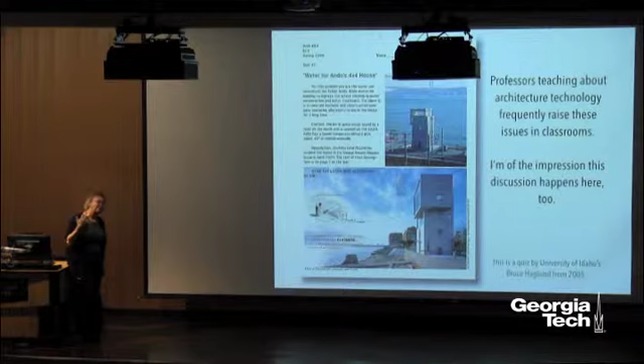You know, Mark mentioned, and incidentally, one of the things I love about dealing with both Mark and Saber is the way that they integrate really rich discourse about buildings. When I deal with them, they're like me. They want to get down there and look at the nuts and bolts and things like that. And that's really rare for design faculty.

I think it's much more common for faculty like myself that teach technical topics to want to engage with both the design and the technology. Design faculty often act like technology is something you can add on later after you've done the diagrams. That may be different here, but that's my general impression with a lot of schools.

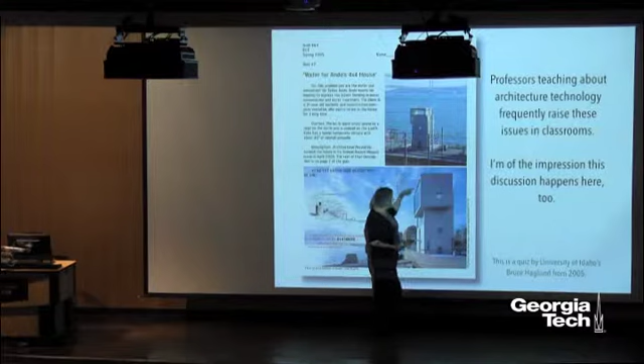This is a test question that another colleague of ours at Idaho made a couple years after the building was completed, in 2005, asking how you would handle some of the water issues on this building. Remember, you're supposed to be able to climb up there and wash the front of this building to get the salt off.

So the water issues in general, let's just start by assuming they're not a conducive part of this whole discussion. For me, as somebody who cares about whole buildings, as somebody who was licensed for about 25 years until I got tired of paying the extra money, I think architecture should have both a pragmatic and a poetic side. I think we can't have one or the other. So I think of it as bread and roses, okay?

And on the side of the roses, that's the whole sort of Vitruvian idea of Venustas, the beautiful things about the building. So with this Ando building, a little tower at the end of the inland sea, that really sounds like a piece of poetry right there. I want to live in a little tower on the edge of the inland sea.

It has an overlarge window. It has a big, tall space. The guy says living in it is like living on a ship. And you can imagine that. Also, if you look more closely, you'll see it's got a really solid base and that it opens up more and more as you get higher, which is another kind of poetic gesture.

And the building has this wonderful sense of both a symmetrical part and an asymmetrical part in balance. And then the bigger game of the two buildings playing with another level of symmetry. So that's the roses part.

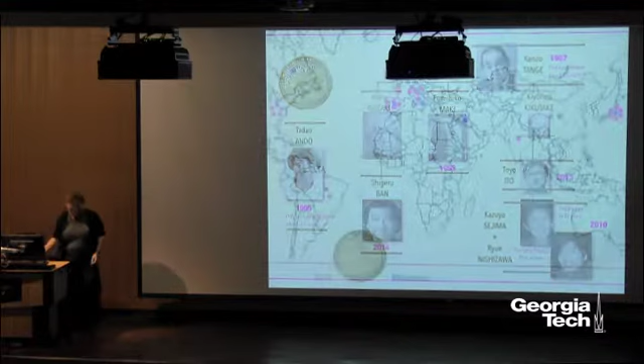If you look at who's won Pritzker Prizes, 7 people from Japan, one of whom operates out of Paris, have won the Pritzker Prize. Only 5 people born in the US have also received Pritzker Prizes. Japan has a third of our population, so they're much more successful on this score. And even if you're looking at immigrants, there's only 9 US-based firms that have won Pritzker Prizes, including people like the Canadian Frank Gehry. There's 6 people living and working in Japan who have won Pritzker Prizes. So the poetry has a real benefit for architects that's worth paying attention to.

On the other hand, the problem is that the reason we get hired, the reason our clients ask us to do things, is not for the roses necessarily, but for the bread. Their decision about the value we bring to them is based on that. And so one of the problems is that if you look at Japanese architects, you can see they're really poorly paid. This is from a few years ago, I think 2013.

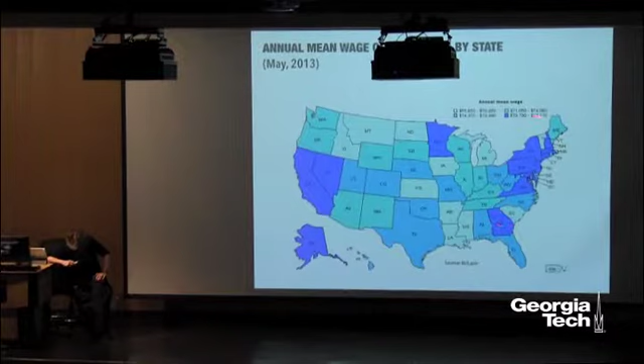The average salary is about $48,000 a year, and this is for people who are around 49 years old with about 16 years of experience. If I told you that you're going into a field where you'd get paid like that, you probably wouldn't be very excited. The good news is in Georgia, it's almost double that, at the exact same time. 80,000 to 93,000 dollars - roughly double the salary for an architect working in Georgia versus an architect working in Japan. That's a big difference, and it says a lot about social value.

If I try to call the office, I never think about what time it is when calling Sejima's office, because there's always somebody there - 3 in the morning, there's somebody there. They don't have the economic infrastructure for secretaries and other kinds of support staff that you're used to here. It's a very, very limited funding context for the studio. So that's an important thing to think about.

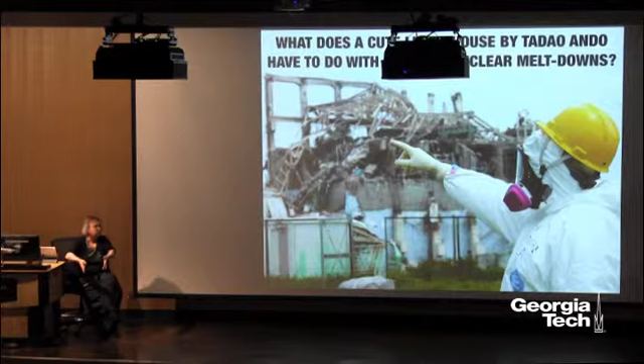One of the things was that in the 1970s, when people were building nuclear power plants, they needed some way to cool them. One idea that looked good at the time was to put the nuclear power plants right against the ocean, because then you could take cold water from the ocean and cycle it through the plant to cool it. Doesn't that sound like a great idea?

The problem is when you have a giant wave that washes up onto a nuclear power plant, it shuts down all the backup systems. And that's why they had three meltdowns. They were actually really lucky—it could have been a lot worse.

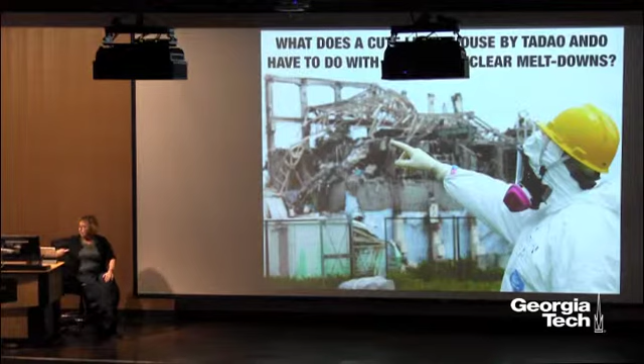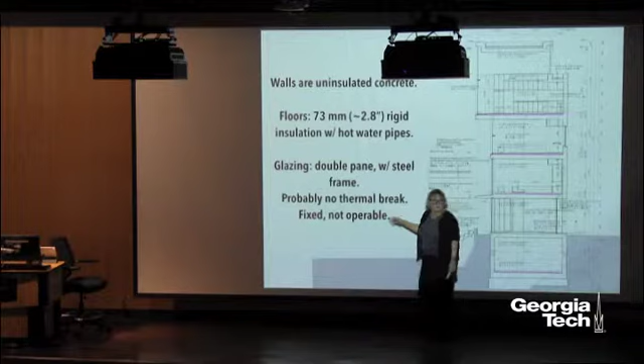There is actually double glazing on that big, tall window, but it's in a steel frame that probably doesn't have a thermal break. There's a guy here from YKK who knows more about whether it does or doesn't, but let's just say 99 times out of 100 in a building from this period, there's no thermal break—and I'll show you other examples. The windows are fixed, not operable. You can't open them. So what are you going to do to be comfortable?

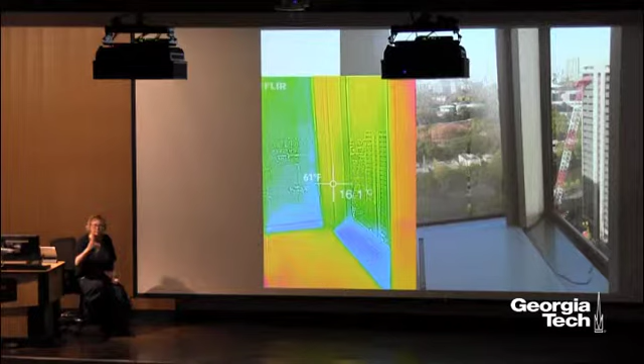Well, the insulation's actually there to keep the hot water pipes hot. You can see it's between an interior space and an interior space. What they're trying to do is make sure the floors, where people walk around in slippers or stocking feet, aren't cold. They thought the best way to do this was to put the insulation right there where those hot water pipes are.

For anybody in this room who's my age or older, these kinds of buildings are not surprising. This one's in Tokyo—it's more recent, and infrared technology allows us to take pictures of it. But if you look at buildings from the 60s or 70s in the United States, you'll notice a lot of the action at the envelope was about dealing with this problem: you have a lot of humidity inside the building, no thermal barrier between inside and outside, the surface gets cold, and you get condensation.

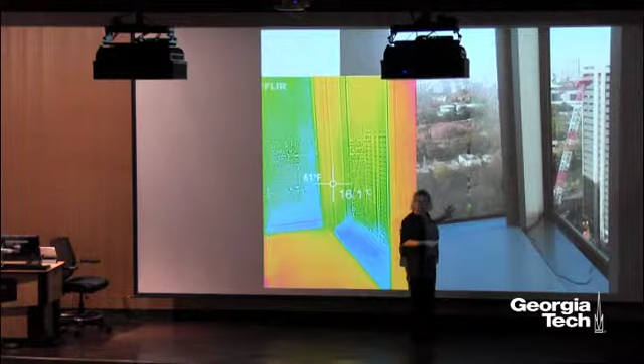This was Dow Chemical's offices. They said, 'we didn't clean it up this morning because we thought you'd like the picture,' because they knew me. This is how much water had collected overnight on their windowsills from condensation. If I'm talking to anybody I know in Japan, they're very familiar with this problem, which creates other problems—Tadao Ando's buildings sometimes have sick building syndrome because that condensation is captured inside the building and can promote fungus and mold.

So this kind of thing is, like I say, not uncommon. We used to have it too—we dealt with it in the 70s. Japan can eventually do the same.

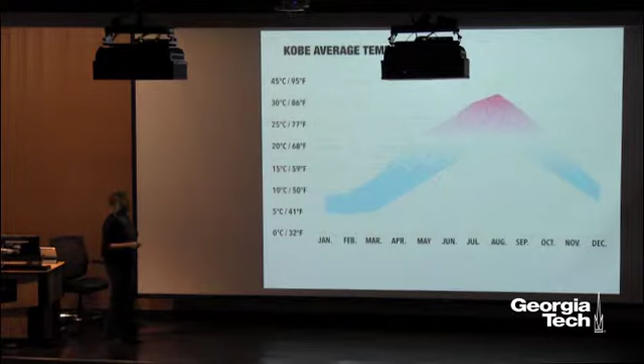Now, Mark and Saber, when I was telling them about this last night, said maybe Kobe's climate is so benign that they don't need insulation. I actually don't think there are many places on the planet where that's true, but you'll be happy to know it's not true here. Here's Atlanta, here's Kobe—pretty much the same latitude. And in fact, if you look up the climate data, here's Kobe's climate, here's Georgia's climate.

You guys get a little colder, as we might be noticing right now, and your summer is longer. But interestingly, the maximum highs and lows are very similar. So this climate is the environment in which this large, concrete, uninsulated building exists.

And this is all buildings. So if we go out into Georgia, some of the buildings you're going to see were built in the 1950s or the 1940s or something like that. And if nobody's done any energy retrofits on them, they're probably not insulated either. But these buildings don't meet Japan's building standards, and the standards are pretty benign, okay?

So the 1999 standard assumes that you're going to have about 4 inches of insulation in the walls and about 7 inches of insulation in the roof. And only 5% of the buildings in 2014 complied with the 1999 standards, right? And 40% of them had no insulation.

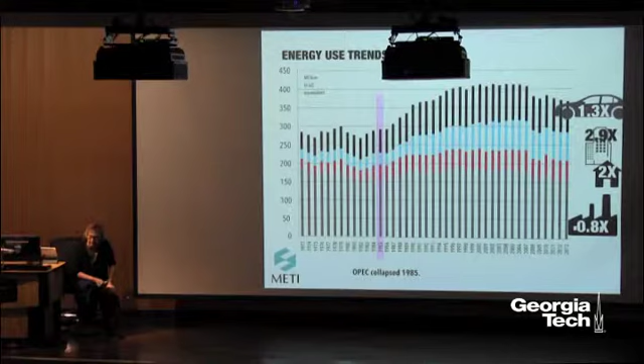Why doesn't Japan, incidentally, those standards I showed you, those aren't mandatory. So why doesn't Japan have mandatory requirements that you insulate buildings? And one of the answers has to do with going back to the oil shock when we all started thinking about this. So in 1973, when we had the first oil shock, one of the things was that buildings used a very small slice of total energy consumption.

Manufacturing, including making steel and concrete, which are very, very energy-intensive industries, used a lot of energy, and transportation used a fairly small slice. But once you started to change the dynamics for how manufacturing used energy, it was also easy to change things like the design of cars and trains. So these two were able to be easily addressed.

And Japan put all its energy into pulling back how much energy was going to be consumed in industrial production rather than in buildings. For the US at that time, this piece was much bigger. We had to deal with it. And so we actually got in front of dealing with energy consumption in buildings as well.

So what happened? Everything stayed pretty flat along this period after 1973 because people were very intensively trying to save their own country's economy by reducing energy demand. All the energy came from outside. Japan's energy self-sustainability rating is about 4%.

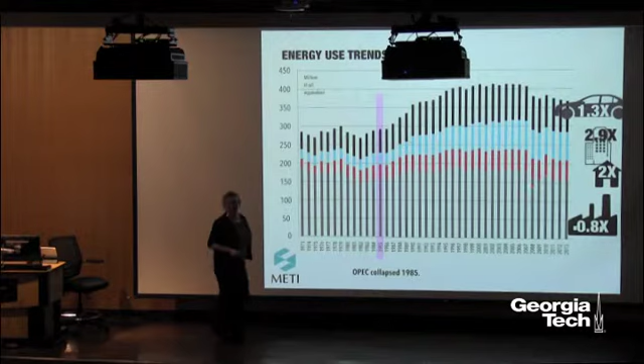Now, these guys don't go up much. Why not? Because in the manufacturing processes, they put in new plants and new equipment, and now they're invested in the new plants and new equipment. And so it's not going to climb as fast. Even though their production's going up, the manufacturing systems are already in place. And you can see transport goes up some, but if you actually look at it in terms of miles traveled or something like that, you'll find it doesn't go up very much.

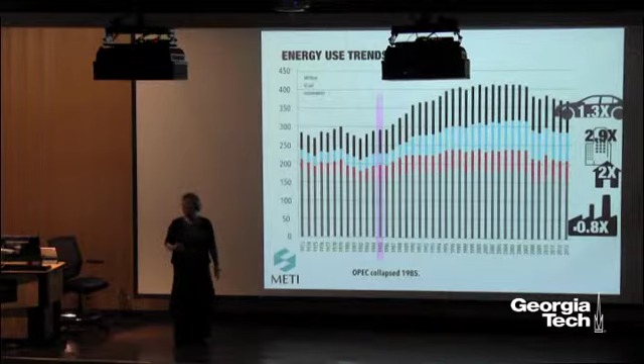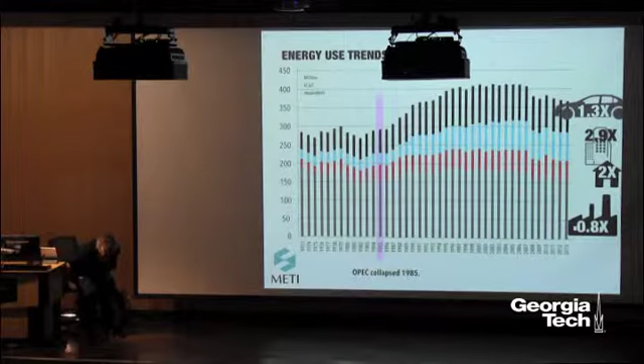But what goes up is buildings. Okay, so manufacturing, the energy actually comes down from '73. Transportation, it goes up some, but the miles traveled goes up a lot. Buildings, residential buildings, 2 times as much energy, and commercial buildings almost 3 times as much energy. So now you're starting to see that the kind of cavalier way that people dealt with energy in terms of the regulations back in the 70s have implications.

So this is Kazuyo Sejima's house. This is where she lives when she's in Tokyo. And one of the reasons I put it up is I wanted to point out that there's another thing going on as well, which is that the architects are thinking of it not as a building which has to survive cold, but as a building which in a kind of old school way can keep you comfortable when it's hot.

So this picture, there's this bench, and it's right there. And there's this giant window that brings air in, and there's a roof piece where almost the whole roof opens up and allows the air to go out. So this is really a shady outdoor space where she can entertain friends and sleep, and all that kind of thing. So that's not bad, well, as long as it's summertime.

Now I'll tell you a funny story about this house. Sejima moved in February, and I happened to be living in Japan at that time. So I went over and said to her, hey, congratulations, new house, right? I brought flowers, all that kind of stuff you would do. And we sat down and I said, how do you like the house? And she said, it's very cold.

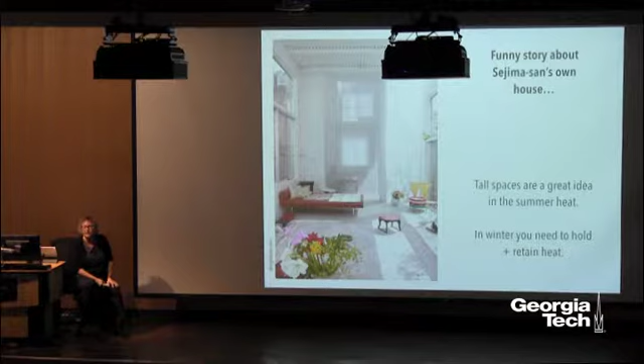It was a pretty cold winter that year. And all of this, right? Concrete floor, no insulation. You can see the roof, no insulation. Walls, no insulation. And all the heat was up there, and Sejima was down here. She was like, I am really unhappy, I'm really cold. I'm going to go on an international trip, and I'll figure out what to do.

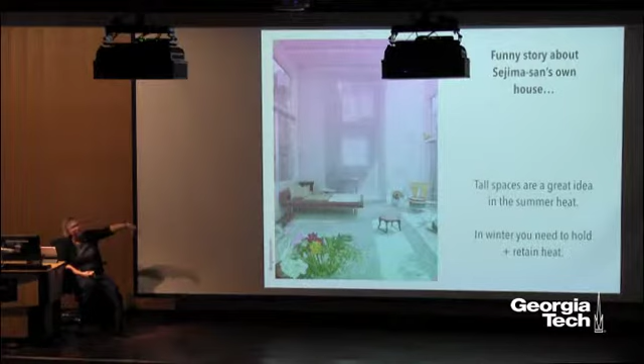And when summer came around, they decided that the best solution was — now if it was here, we'd say insulate, right? But that's not what she decided to do. They tore up this concrete floor and put in a heated floor, so that she would be more comfortable and there'd be more heat radiating from the floor since that's where she was. For anybody who's studied energy issues, this seems very counterintuitive.

But what you guys have to understand is the whole discussion we've had about hot air being up in the ceiling and all that kind of stuff comes from more than 40 years of awareness of the way we need to conserve energy in buildings. It's become very commonplace to understand it. It's talked about in the newspapers, it's on the television. These kinds of discussions aren't happening in Japan because there hasn't been a sense of urgency about doing this. So what happens is that energy becomes a kind of luxury, especially electricity, which is seen as a luxury in Japan.

This is a new art exhibition. It's 100,000 square feet of immersive technology that just opened up last summer in Odaiba, which is a recreational area of Tokyo. It's by an artist group called teamLab, and the thing is called Borderless. It has 500 servers, 470 high-power projectors, and a bunch of human load in it because everybody wants to be there. And all this heat's being dealt with by air cooling systems, not by any kind of insulation.

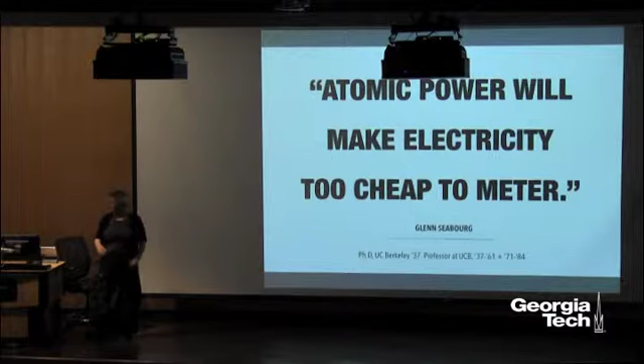I don't know if you know Ryue Nishizawa's work. Nishizawa did this separate from Sejima-san. SANAA is their joint practice, and they each have their own individual practices as well. This is an art museum called Arts Towada, up in northern Japan.

And if you read about this normally, this one's from 2008, you're going to see something like this. This is from an art magazine, I can't read it from here to tell you which one. This is what the author said, based on what Nishizawa told him.

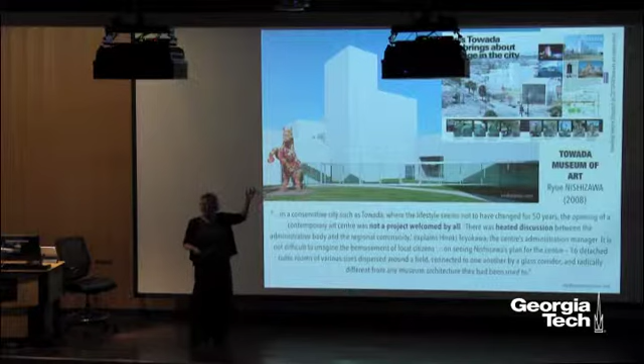In a conservative city such as Towada, a bunch of old farmers, where the lifestyle seems not to have changed for 50 years, the opening of a contemporary art center was not a project welcomed by all. Now this cosmopolitan journalist says, why would you not want this fabulous Nishizawa building in your midst? You must be rubes, okay.

They're not rubes. They're just fiscally concerned. Here's the total operating cost for the building, $1.1 million. It's a town of 65,000. So I did the math. It's going to cost $17.60 a person to operate the building every year.

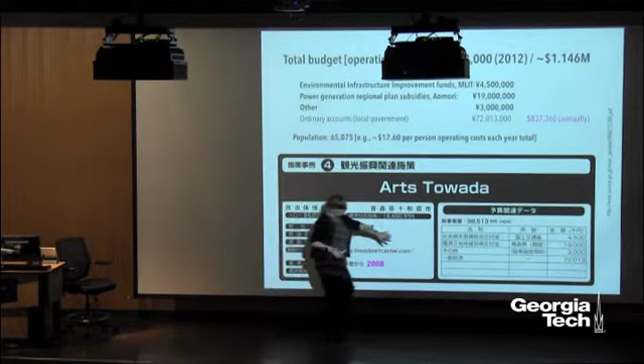They get a certain amount of it from the national government and from what's their version of the state, called the prefecture, but they pay a lot of it themselves.

So they didn't want to pay for operating this expensive building. And why was it expensive? Well, it's in a cold place. The average temperature in January is about what it is, or what it's going to be here in the next few days. It snows a lot.

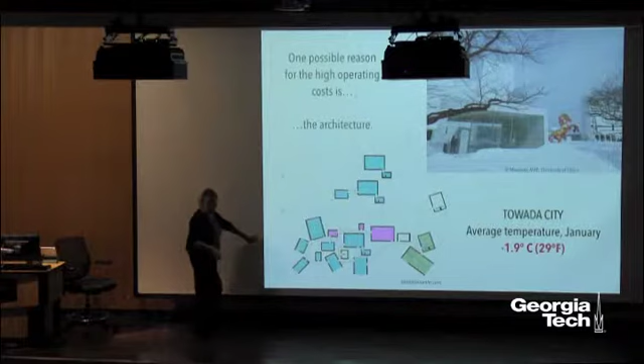And this is the building plan. I don't know if you noticed, but every single exhibition space is a separate and isolated room. And also, all of these are single-pane glazing, and again, no thermal breaks in the framing.

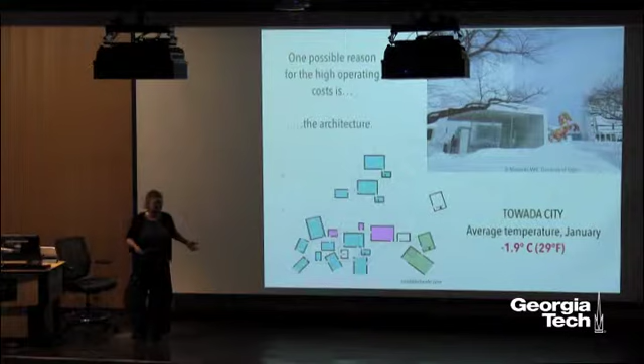So one possible reason, I don't have the budget information for the high operating costs, is probably keeping it comfortable for the little old ladies and little old guys.

So I said I was going to connect this to nuclear power. One of the things that's really interesting is the more electricity you use in Japan, the more money there is for nuclear power, because there's a hidden subsidy in everybody's bill. That subsidy yields about $2 a household a month. Not a lot of money, but you don't see it on your bill.

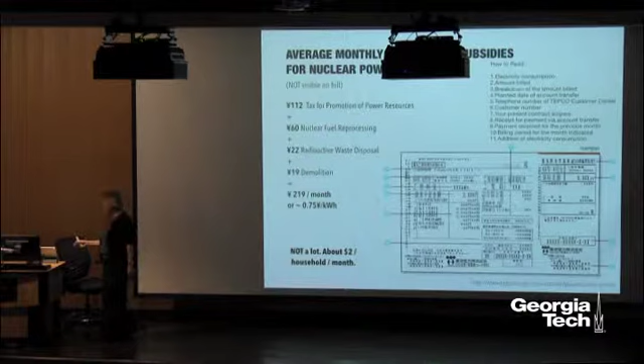You can go through your bill, and I put a bunch of stuff up there, and you won't see anything that says nuclear subsidy. Interestingly enough, more recently, there was a desire to start to also subsidize renewables, and you can see the 6 cents involved for the renewables on your bill.

So they collect this money for the nuclear industry, and what do they use it for? They use it for promotion, for getting local communities to be excited about having nuclear power in their community.

So if you've been to Japan or you've looked at the magazines and thought, wow, this is a town of 65,000, it's a bunch of old people, what are they doing hiring Nishizawa, and why doesn't my town of 60,000 hire Nishizawa? The answer is your town isn't getting subsidized to take Nishizawa, and that town did.

And after the nuclear power plants melted down, one of the things I did was I started digging around a bunch of information, just kind of randomly, like you might do, trying to figure out, is there nuclear money in any of the buildings that I've been looking at?

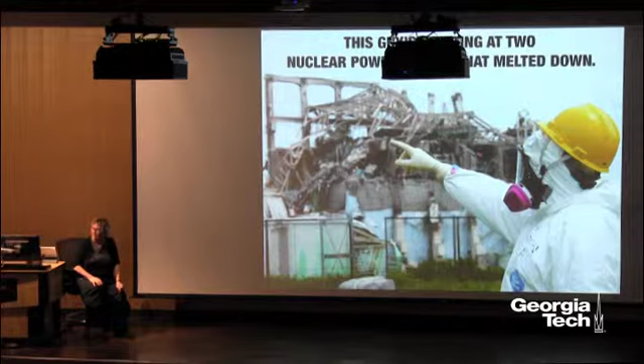One of the things that's probably occurred to you by now is architects as a group are incredibly idealistic people, right? We all want to have positive change in the world we live in. So when these nuclear power plants came down, what did my community do? What did architects do? They did what they could. They put a lot of energy and a lot of their own money into doing things.

But you'll notice a thread, which I'll talk about in a minute. So one guy organized a kind of Tour de France in Sanriku, up near Rikuzen Takata, where they had people doing bicycle races through the communities, kind of bring excitement to the community, bring some money, that sort of thing. Kengo Kuma, who you probably know about, proposed a new museum built of rubble. That didn't go over so well, as you can imagine.

Ito Toyo got some young architects together to design a community center in Rikuzen Takata, and they also raised all the money for it themselves, which sounds really great, except I have to tell you, 60% of the population of this town is over 65.

And I mentioned earlier about knees. I actually met the mayor of this town, and he said, this building got the Golden Lion at the Venice Biennale, and that makes no sense to me because most of my local community can't get beyond this room, right? Why are you people giving awards to this building?

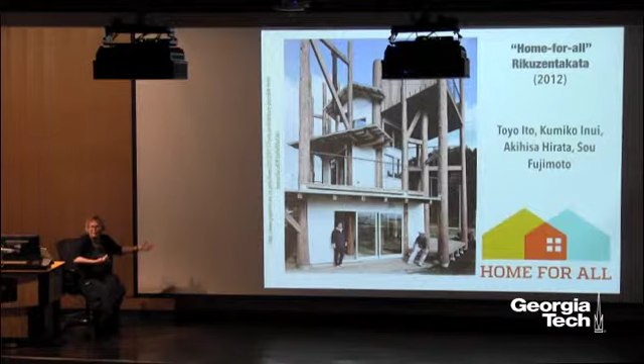I went around and I talked to some other people at some of these buildings. All of these are funded through Home for All. I donated $10,000. Some of your professors probably donated money. People really tried to kind of support the citizens of Japan.

But I was also pretty comfortable. And then I saw, oh, there's some insulation and some metal that's taped to the floor. And they said, we did that. They did it themselves because their feet were cold and their legs were cold and they weren't using the building. So they went ahead and they did it.

Another group, which I'm very fond of, ArchiAid, raised about $500,000 internationally. 300 architecture students and faculty from around the world went and worked and got involved in projects. Another 200 students in Japan. They did a lot of workshops.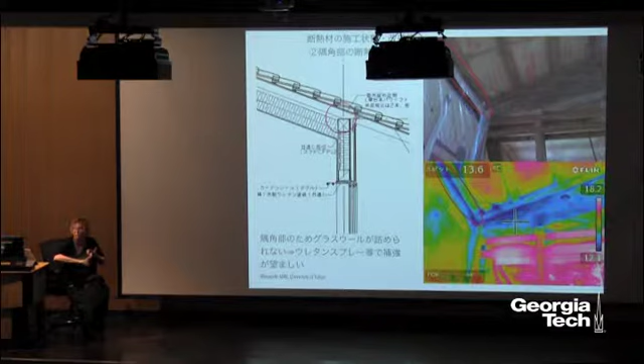Well, they started to realize they wanted to save energy in these buildings. So those two architects came over to California and met with a bunch of my colleagues, because there's no infrastructure for finding engineers who can help you figure out how to save energy through passive systems in your buildings. If there's no demand for it, the contractors and engineers aren't going to learn how to do it. So you had to go elsewhere. These architects came over to California, and some friends of mine advised them about how to design this building. They talked about vapor barriers and about creating locations where you'd have cold air seeping in and changing the performance. They showed them how to use infrared cameras during construction to create a safer, more comfortable environment. Well, there was a problem.

So this is that little old lady's house. I went to visit her. One of the things you might notice is here's a kerosene heater. A lot of people in the country use kerosene. I'm pretty sure none of you have ever been in a space where kerosene was the primary heat. Well, maybe when you were a kid. But fundamentally, this is not a very healthy way to do things - the exhaust from kerosene burning is bad for your health. Now this little old lady said, I'm in my 80s, I don't really care, I'm going to go ahead and burn my kerosene heater.

So all the people in the city got really upset - what are we going to do? Because we don't want to be responsible for shortening her life. So they decided what they were going to do was basically vandalize the high-performance windows and doors, so that you'd get a lot of cold air drawn in through these windows and doors, creating natural air movement. For those of us who are older, you can remember when there was talk about what do we do if the building doesn't breathe, right? This was a conversation we had 40 years ago. So they damaged the weather stripping and stuff. Now the little old lady's really happy because she operates her kerosene heater, plus she figures she pulled a fast one on the flashy architects from Tokyo.

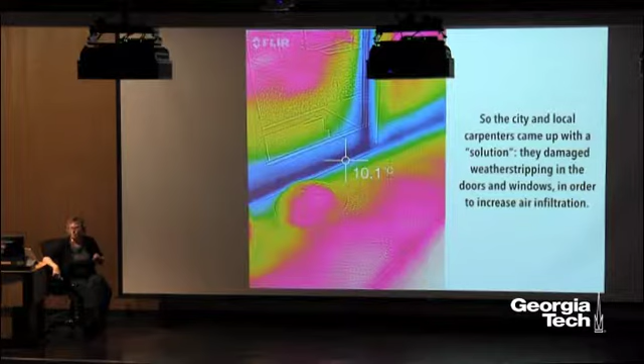The other thing I noticed was that the other clients had these air conditioner heat pump type units that they could turn on as an air conditioner or heater, with a remote for it. They said to me, we've ended up using kerosene too. I was like, why are you doing that? They said, well, we can't ever figure out which remote is the right one. I point at this one and turn on the heat two rooms over, and that's not what I want. Then I have to read it, and I don't know where my glasses are. The system was actually too hard for them to use. So even though some of these buildings could have made really persuasive arguments for high-performance architecture in these communities, the fact that they were incompatible with people's understandings about how to use buildings became a problem.

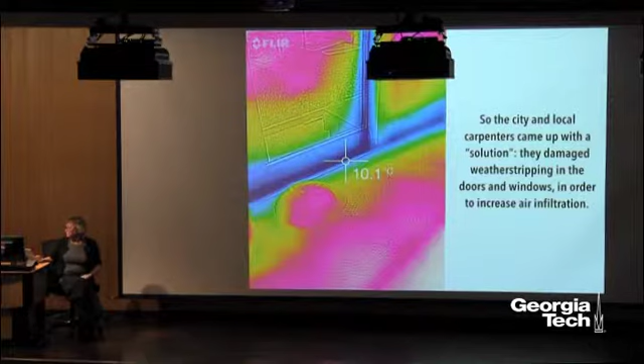ArchiAid was working all over Tohoku, trying their best. In truth, they only built on about 30 sites. They did some other stuff, but fundamentally, if most of them look back, they say we put a lot of effort into it, and we're not sure how much we accomplished. Meanwhile, the Japanese people were much more effective. They were going crazy because they suddenly realized if a nuclear power plant melted down in their community, the government wasn't planning on doing a lot to help them. So the Japanese people were literally out demonstrating, which is very unusual in Japan. As a result, Japan has closed down a certain number of its nuclear power plants.

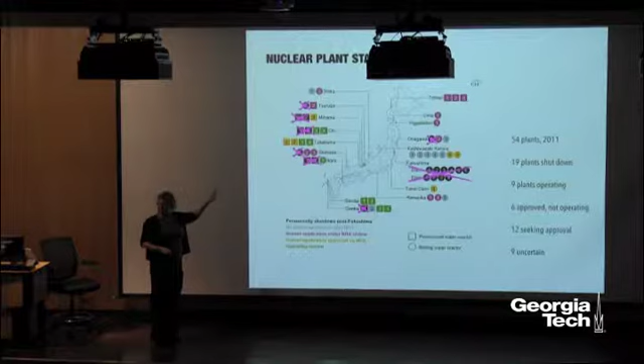All of Japan's energy has to be produced domestically. They had 54 nuclear power plants on the day of Fukushima Daiichi's meltdown—1/10 of all the nuclear power plants in the world. Pretty dramatic, huh? This is where the meltdowns occurred, and the nearby plants essentially shut down.

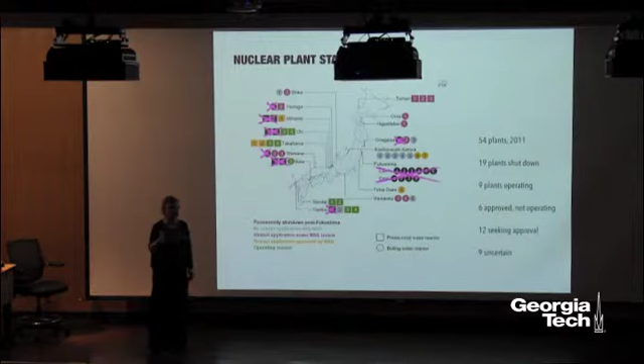A couple others figured out this might not be a good idea—they're pretty old, so about 19 plants were shut down. They have 9 plants operating now, with a couple more opened in November. 6 have been approved but aren't operating because of public hostility to nuclear power. 12 more are seeking approval, and 9 others represent the industry trying to figure out how far they can get. If they can't get these approved, they'll give up on those; if they do get approved, they'll try to get the other 9 into the queue.

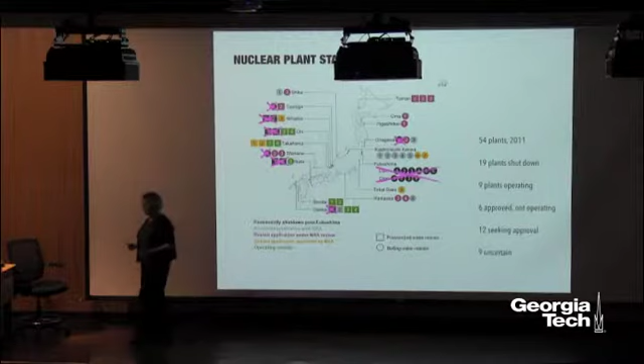So there's still a big question about what Japan's energy performance and practices are going to look like. By the way, here's Ohi, down in western Japan, just above Kyoto.

The other thing they started to discover is that under these nuclear power plants are fault lines. You guys don't live in a seismic area, but I do—the reason we had an earthquake this morning is that we have a fault line about 100 feet from the building I teach in. When you have a fault line, the Earth can move one way or another, and a lot of these nuclear power plants turn out to be on fault lines. That's nobody's fault, not to use another pun.

The reason for that is seismic engineering is only about 120 years old. So when they built these plants in the 70s, 50 years ago, seismic engineering was a lot more rudimentary than it is now. They only decided there were plates and fault lines in the 1960s, so they didn't even know to look for this stuff. When plate tectonics was first discussed, it was incredibly controversial, so they started building nuclear power plants not knowing how this would play out.

One thing you might be curious about: did demand for energy drop in Japan after these meltdowns? Kind of. Nuclear power dropped a lot, but Japan got a great idea, which isn't unusual—not to reduce demand, but to increase supply elsewhere. And where did they increase supply? Coal and gas. Japan is the only developed country in the world right now building coal plants. I figured you guys would love that one.

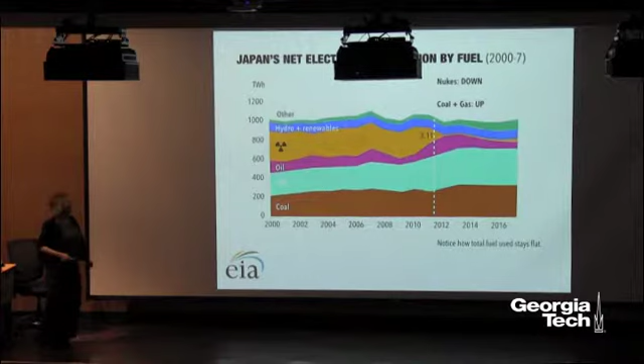Coal right now—well, 2 years ago—was supplying 1/3 of Japan's electricity, and it's up. There have been articles on why Japan finds coal hard to quit. Let's look at these numbers: coal's share of Japanese electrical power is expected to increase to 46% by 2030 if they can restart more nuclear plants, and if they can't, 56%.

Now, I don't need to tell you about climate change—you all know, because this is the challenge for your generation. In Japan it should be as well. Most of Japan's major cities are along its shores, so if they see sea level rise and nastier storms, it hits them where everybody lives. Increasing coal production is probably not the right solution.

I'm not going to go into great depth, but one reason coal and nuclear power are so entrenched is that they are highly valued by the business and political communities. And we, as architects, are not—our voice is not at the table in terms of a solution for what to do about nuclear power in Japan. That's a pretty serious thing.

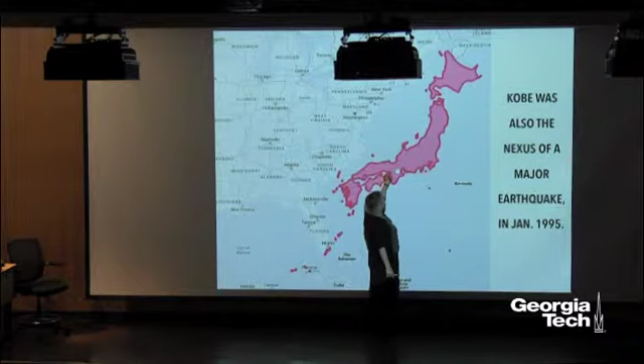One of the reasons I felt like this was going to be a great thing to do was I'd already been through a big earthquake in Japan. Remember Kobe? Kobe had a big earthquake in 1995.

Really interesting earthquake for those of you who are interested in earthquakes. The epicenter was below the city, so the buildings moved up and then came back down again. This was City Hall in Kobe. That used to be a story.

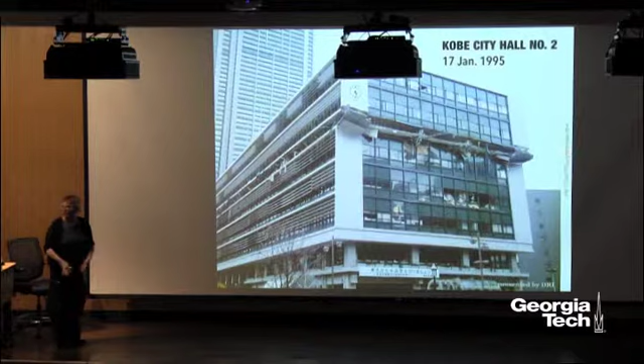This is actually the building code's fault, because there was a law that said you had to have a really rigid base to transfer the stresses into the ground from above when the building was starting to move, but it got narrower at this level. So as a result, when the building came up and then came back down, it pancaked in the same place in building after building after building.

Now this was 5 in the morning, nobody died in this building. Aren't you glad to hear that? A lot of people died in Kobe, but not in this building.

So what happened? What happened was really exciting. This was my exciting moment - Mark mentioned my first book. The 1990s were this amazing flourishing of structural design solutions in California because we had the Northridge earthquake, and in Japan. A whole bunch of new ways of doing things, like buckling-restrained braces and other solutions, appeared at this time and have now become integrated.

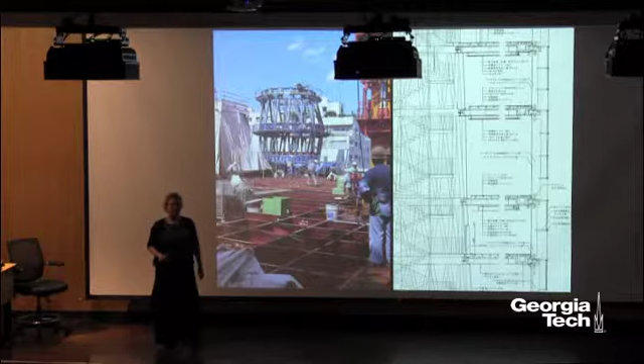So I knew what was going to happen after Tohoku. My plan was that it was going to be really straightforward. There was a crisis, and everybody was going to go, hey, what went wrong? They were going to do some critical study, and then figure out how to change course. And I was going to go to Japan and see exciting new solutions.

Because I got to tell you something, and Susan and George saw this in that first workshop too. Japan's highly competitive architectural community can do amazing things when they put their mind to it.

They had this Apple store that they were going to have people redesign, in Taipei, and Finland and stuff like that. They had different teams, and the goal was to get to zero energy. The first day, Susan and George said, ha ha, this is not going to happen. We figured out how to run the calculations with grad students who didn't sleep for 4 days. The grad students would keep these computers running overnight, and every day we'd come in and say, okay, you're this close, now let's talk about lighting. We'd move them forward, and 2 of these teams actually got to zero energy.

Zero was the target. Susan and George were blown away. They would have hired anybody who was in that room at the end of this workshop, because what they did was amazing. So I thought, what we were going to see by now was stuff to excite the rest of the world. And why did I think we could be a part of it?

So this is a part where I tell you a little bit about California, because California is, as it often is, a provocative alternative to the way other people live. So here's electricity demand in California, okay?

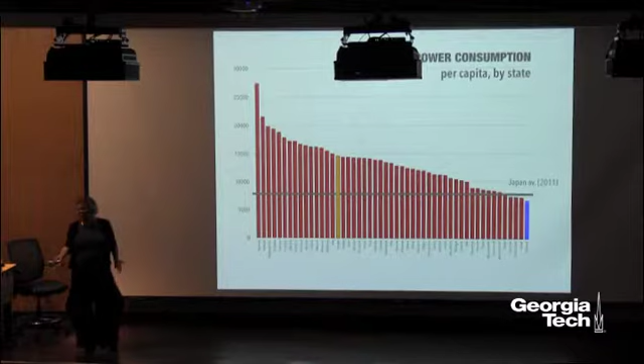So how does this play out, just to let you know? Here's Georgia, by the way. You are above Japan, about double at this period. Here's California down here. And if you want to know who the highliner is, it's Wyoming. Why is it Wyoming? Because it's an energy-producing state. Places like Texas and Wyoming consume more energy because their politicians are not trying to put the brakes on it, and that's a very straightforward answer.

But why are we so different? Not just because we're from California. I mean, we like change, but it's not just because of that. So in 1959, we had a nuclear meltdown.

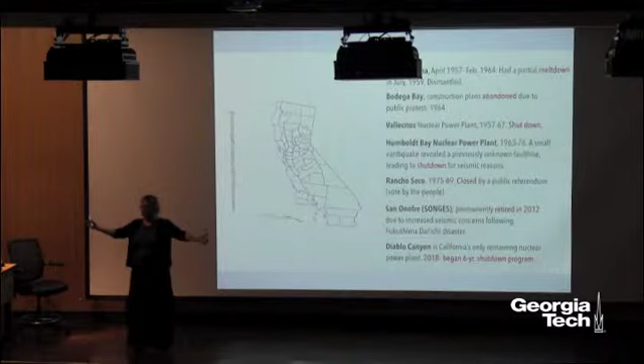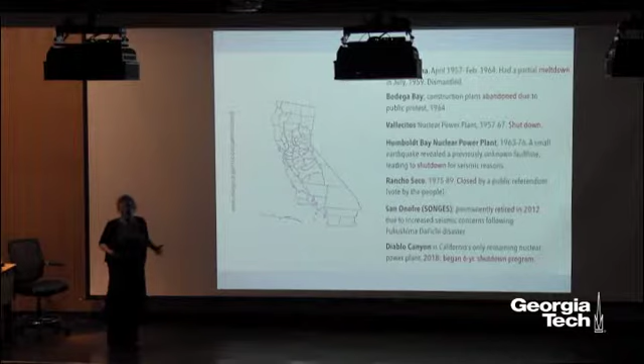We had another one, this is a really good one, Bodega Bay. If you fly into San Francisco coming down the coast from the north side towards SFO, you'll see this peninsula with a big hole. They were going to build a nuclear power plant there. They discovered in the 60s that there were fault lines. A bunch of people got in boats, little tiny boats and kayaks and all this stuff - we are California - and they surrounded this peninsula, and they raised heck, and they prevented Bodega Bay from getting a nuclear power plant. So the energy companies gave up on that one.

This one, I think, was just shut down because it was kind of a test reactor. Humboldt Bay, here's another one. All of a sudden, there was an earthquake, and people said, oh, it has fault lines too. Maybe we don't want to have a nuclear power plant on fault lines. So they shut it down.

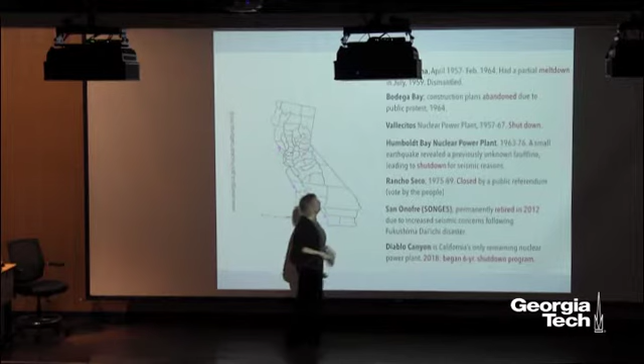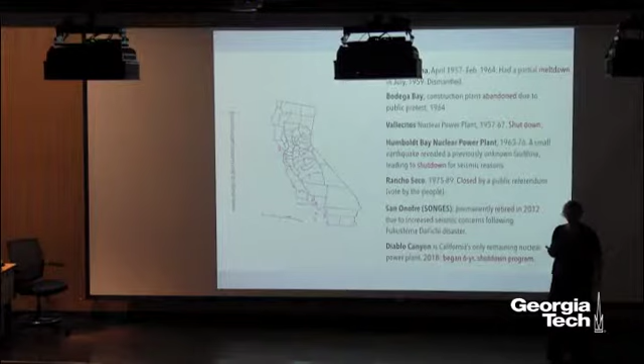This one's super interesting. This is in Sacramento, which is our capital. What happened there is that people like you started a referendum to close down the nuclear power plants. You can imagine they were told this was going to cost the community a lot of money - you're going to have to shut down the power plant, you're going to have alternate forms of energy, are you sure you want to do this? And they said, yeah, we want to do it. So they shut it down. Economy went up. Childhood leukemia went down. So, great example.

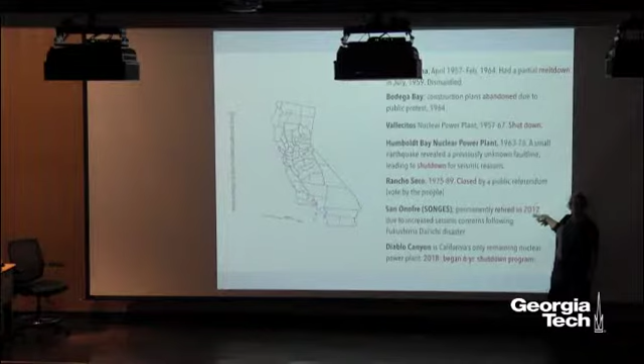There are books in Japanese about this one. We had 2 nuclear power plants on the day Fukushima Daiichi happened. One was immediately retired. The state of California said, we don't want what's going on there. The second one, they decided to retire at the end of last year, and it's going to take 6 years to do it. So we've actually gone ahead and shut a bunch of our nuclear power plants.

And what does that look like? It looks like work for you guys. It spurs economic innovation. Efficiency-related jobs up 15%. Also a lot of money for education. Less power plants, we didn't have to build new ones. 1/5 of the state's electricity needs are met by conservation. So our population's going up, but we're not building a lot of these new plants. Slash CO2, that helps you guys out so you can raise babies in a better environment.

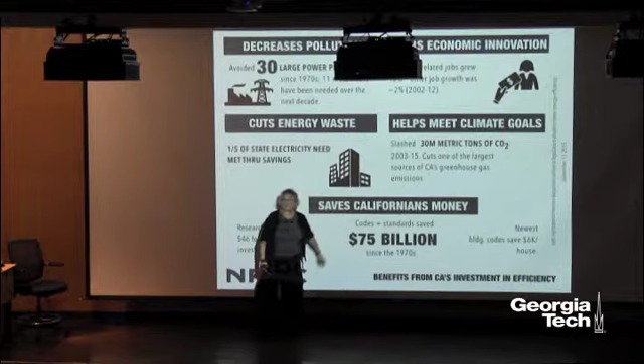Research is a really interesting area, and I'm going to show you one example. But research is part of what we as professionals should also be doing. So we saved money for our state, for individuals. We created jobs for people. We advanced the profession. We have this kind of virtuous circle, right? You can't do this only with the market, but performance standards can start to drive the market, and performance standards also drive innovation, so that you start to get these 3 poles working together to create more exciting architecture.

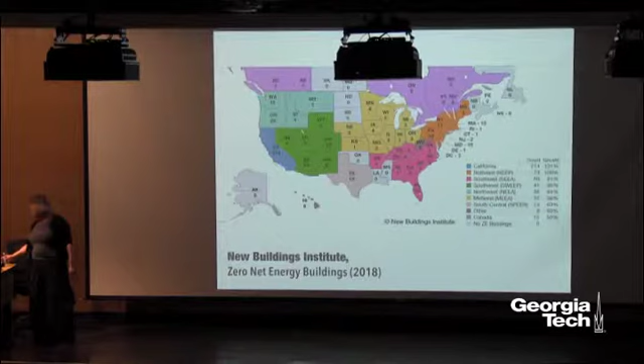I know, I got to finish this up soon. Let me show you this. You've seen how we're spending it. Zero net energy buildings, we have 200 in California. You've recently built 3, and you could be designing those buildings. You know how, right? But you also need people to drive it. So the belief in California is that well-considered regulation drives innovation, benefits society, and benefits our profession economically.

And people say, are you sure? And the answer is, the numbers don't lie, okay? The GDP in California is higher than the rest of the country.

Okay, I'm going to jump forward a little bit, and I'm not going to show you that workshop, but I want to talk about Kazuyo Sejima again, because I think this is really important. Some of you have probably seen Kazuyo Sejima's house from around the same time. This is the Plum Grove house. And it comes from that stuff that happened in Kobe. There was incredible excitement from the mid-90s on about new structural solutions.

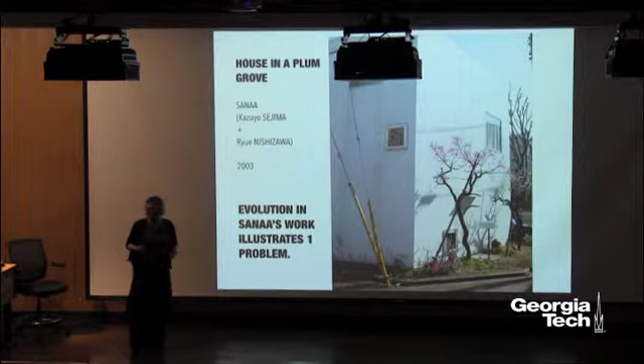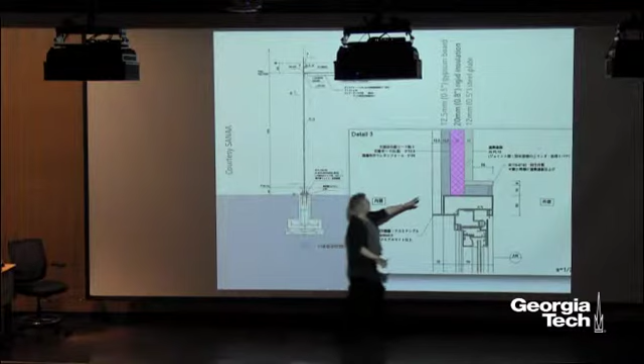So Sejima had a new idea: I'm going to build a house where the walls are the structure, and they're going to be made of steel, and they're only about 1/2 inch thick. And so here we go. Don't do this in your studios, your professors won't believe you. But that's what the wall looks like. It's steel, 1/2 inch steel plate in small cells.

The drawings show some rigid insulation. I've been on that site, I never saw it. One of the people in the office told me they drew it for El Croquis because El Croquis would not publish a drawing without insulation. I don't know if that's true or not, but I kind of believe it. And then gypsum wallboard, because that's required by the building codes, okay? So they glued the gypboard to the wall because it was required by the building codes.

And this is what the section looks like. So the roof had roughly R3 insulation. The walls had, if it's really there, roughly R4. The floors have R6. It's upside down again for the same reasons I told you about with Ando. And then, Mark's unhappy I didn't have this written on here: there's an R1 paint that was developed for NASA, that cost a lot of money, that they painted on the outside of this building.

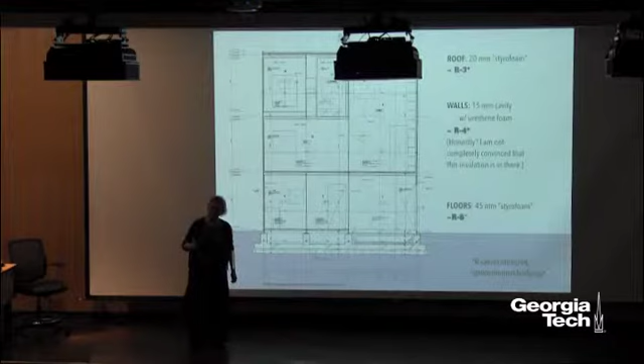Now, one thing that makes me crazy is they could have loaded up that roof with insulation super easily, right? And really enhanced the thermal performance, and it wouldn't have changed the aesthetics of this building one bit. So there was one easy move, but you had to understand building performance to do it. And at this point in time, Sejima didn't understand it.

Some of you might have been to this building, done around the same time, the 21st Century Museum in Kanazawa. I've been there, 2 big panes of glass. In fact, when I went there when the building was under construction, I took this picture. This is the detail of those big glass walls. So it's steel, no thermal breaks, 2 panes of glass laminated, and then again, use heat to maintain comfort. So here we are on the site with that detail, right? Okay, so we understand, 2003, 2004, she's not thinking about it.

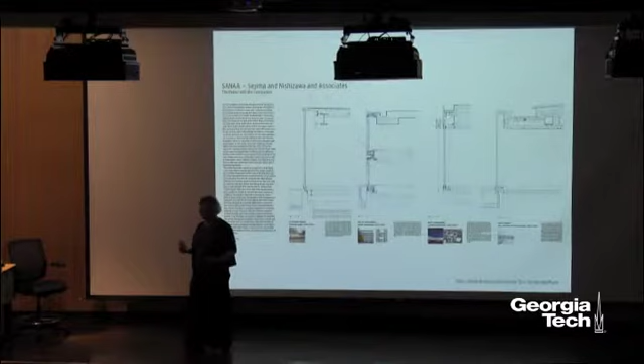Now, I really love students because you guys ask great questions, and you share them with us, and you make us think differently. So a guy who was a PhD student in Milan did a really cool thing: he started comparing Sejima's buildings in different countries over time. This is what he discovered.

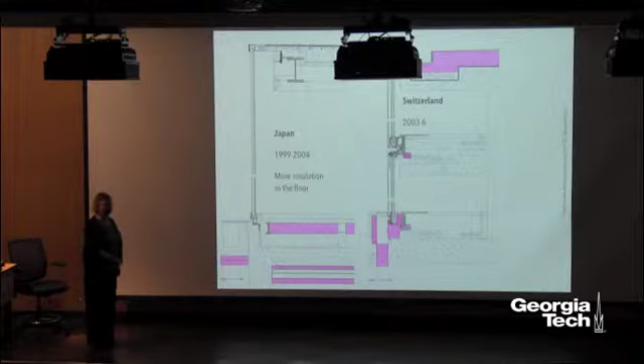He discovered that, so this is the building I just showed you. There's all the insulation—it's getting familiar, right? It's in the floor. It shouldn't be in the floor, but it's in the floor. Don't do this, right? Somebody's gonna make it a test question this year anyway now. A little bit up there.

Okay, then they get to Switzerland. Switzerland has energy codes, so they say, oh, we gotta put insulation in. And they've actually got triple glazing. There are some thermal bridges, because they're still trying to work it out. But they're working with local architects who are helping them figure it out. And then the next building in Switzerland, now they're getting a little more insulation.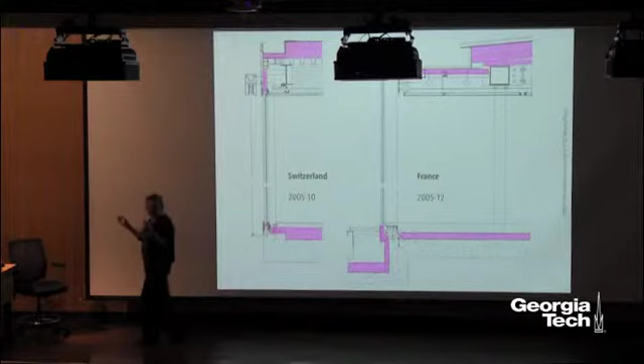France, they finally get it, man. Load up the roof, right? Lots of insulation in the roof really helps. But here's the thing: knowledge alone is not power. Remember what I said about the fact that you need that infrastructure of other people working with you.

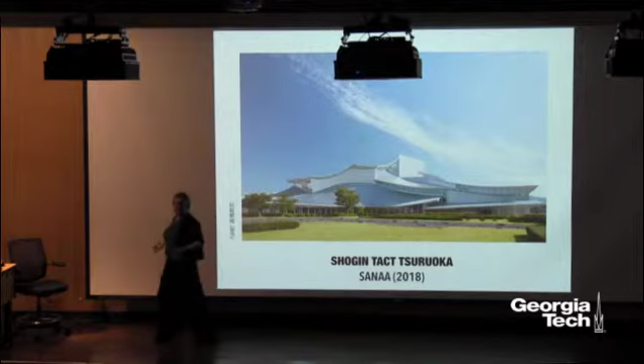Mark and Saber and I went to this building last summer when it was just being finished up. It actually opened in October, Tsuruoka. This is the biggest building Sejima's done in Japan in a while, and it's a really beautiful building. But this is what the insulation looks like. It's there more for sound than it is for thermal reasons.

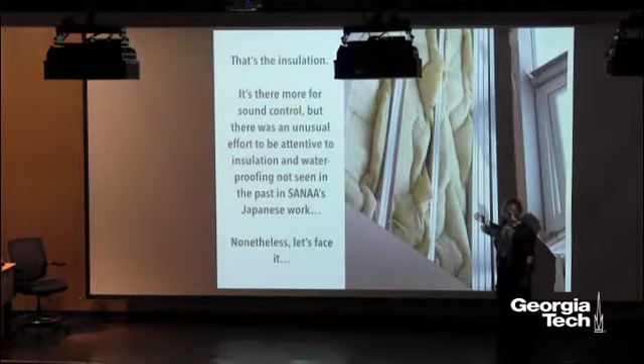You can see that there's the insulation there, but just notice how it's even been put in. This isn't a dumb contractor either—this is Takenaka Construction, one of the world's finest, well, I used to think one of the world's finest construction companies, but when it comes to insulation, maybe not so much, you know? You can see that they were just kind of jamming it in, and most of your professors have told you that if you just jam it in, it doesn't work very well.

So you have a situation where you need those other people around. In short, knowledge alone is not power. Four more slides and I'm done.

What about you, right? What about you here in Georgia? And the first answer is you still need to be educated. You need to know what you want to be able to do. You need to know what the good tricks other people have are and how you can utilize them.

So, here's from your classes, right? This is the building physics modeling class from last fall. Some of you took this, Architecture 6242, right? Okay, there you are, you're doing that part, that's great.

Another one is to find ways to express thoughtful leadership, which seems to be something you guys are actually working on. These are you guys, right? Jeffrey Collins and Soline Karim. I don't know who they are, I don't know if they're here today, but if they aren't, you can tell them I called them out.

And you need to do that because you need to be at the table. Remember, the politicians and the business people are at the table, but the architects who are leaders in Japan were not invited to the table and have not been able to fight their way in. So they're not influencing decisions and discourse.

And that leads to the last one. I thought this is the way it works. That's not how it works, okay?

You and I all know that climate change is going to change our profession. And if you wait, other people are going to decide what that looks like. So what you have to do is start thinking now about what your contribution is going to be. You have to set the table now.

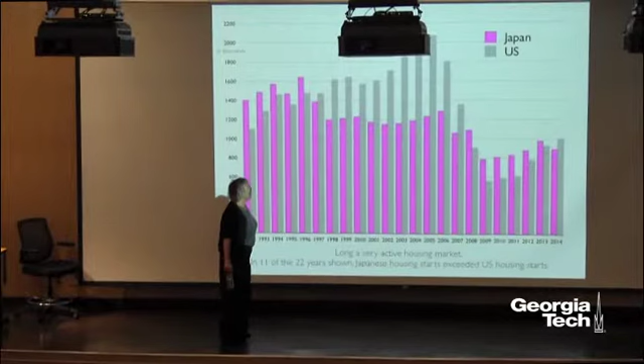So in Japan, buildings are commodities. They last 25 to 30 years, houses especially, and as a result people think of them like cars. They're less concerned about aesthetics and fine-tuning for their own needs, and much more interested in production. During this period from 1992 to 2014, half the years, Japan built more single-family houses in actual numbers than were built in all of the United States, even though we had three times the population. So now you've got a very developed industry without the challenges to prefabrication that we have, because it doesn't have the aesthetic issues about customization and visual appearance. As a result, you can fine-tune production. In actual fact, the prefab industry is having a lot of problems, and I'd be happy to send you a chapter I have on that.

My cousin had a house for 30 years. He leveled the entire house, they brought the kit of parts in, and everything just fit perfectly. The joint lines were like a product, like an Apple computer.

So I gave a lecture in Sendai, this is probably 15 years ago. When you're a foreigner in a country, a lot of times people ask you to talk about your own country. I was on a Fulbright, and they asked me to talk to a bunch of old guys up in Sendai who were studying English. I thought, old guys aren't interested in most of the stuff I research, so I decided to talk to them about resale on residential property and return on investment.

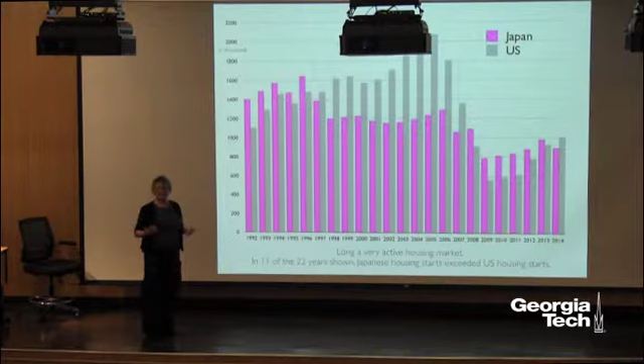A lot of you guys might be really excited about the funny houses you see, like the ones I showed you. But they're being built in a very different kind of economic context, with very different kinds of pressures and expectations.

Let's get a question from a student. Any students have questions? Please have questions. A bunch of them fled, but the grad students stayed, right? Yeah. Hi. Hi, I'm Adriana.

I'm interested in knowing if in your research, or maybe with your students, you've looked into systems of generating electricity from more renewable methods—in other words, can a building consume the energy from waste that it produces? There's a lot of interest in this in Japan, but what most people will say, and I'm going to show you a slide that backs that up, is: the first thing you want to do is reduce the amount of energy you demand, and then create renewables.

Imagine you buy a '67 Chevy—pre-oil-shock, big boat, made of steel, land yacht, right? Even if you try to put an electric engine in it, the thing isn't going to function as well. It's too big, it's too heavy. You try and take it on the highway and you're kind of going—okay, so you want to think about that.

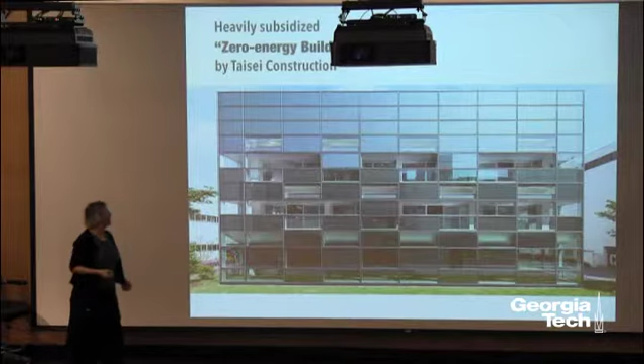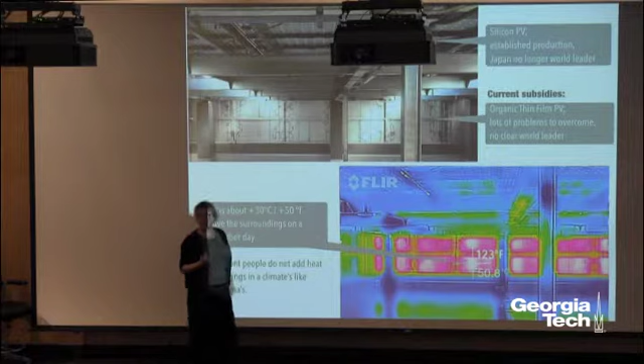There's a lot of subsidies in Japan to do that. This is a zero energy building done by Taisei Construction, one of the innovative examples I was looking at. Now, I had a kind of secret weapon—a back on my phone made by FLIR that allowed me to take infrared photos. So when the guy walked me around and showed me this building, I said, can I take a picture? He thought it was going to look like that, but I took that.

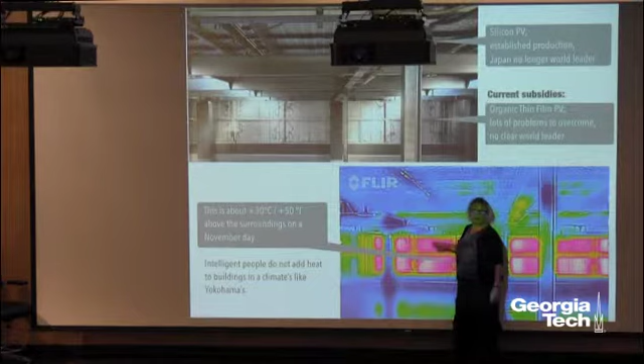It's 123 Fahrenheit on the back of this thin film solar window. These are supposed to be creating energy, but they also create a lot of heat because they're very inefficient. This is in November, so it was really hot. He freaked out—he was trying to get me to delete the photo. I wasn't going to delete that photo; I thought it was a great photo.

Here's the actual way that solar wall is designed—you can see how they're bringing the electricity off. He also showed me this model, which demonstrates, again, no thermal breaks. For years I bugged this guy to answer me: why didn't they put thermal breaks in this window? Every single time I talked to him, or to his boss, I'd ask. I was walking around saying this to a bunch of people.

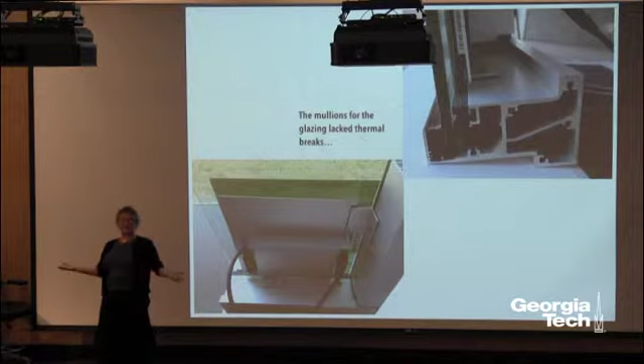Mr. Yagi here is from YKK. He and I are fighting the same battle on this—he wants Japan to have better windows too, because he can sell them and make a profit. And I'm really good with that, because if he makes a profit, then you're not spending money on the electricity. It's like your insulated cup.

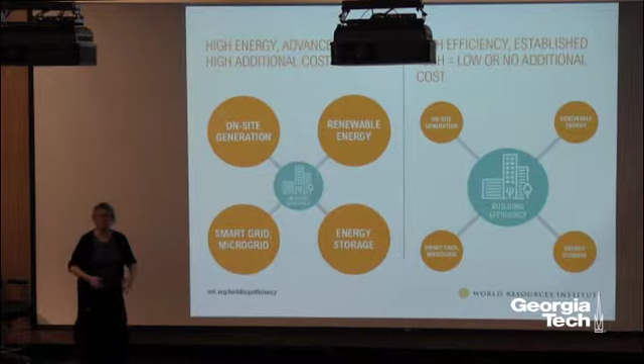So right now in Japan you're seeing a lot more of that. The thinking is this: you're putting in a lot of high energy advanced technology—all those solar panels and thin film take a lot of electricity to produce, so you have a high embodied energy. And what we do, our piece, isn't getting a lot of attention—what we do in California looks more like this.

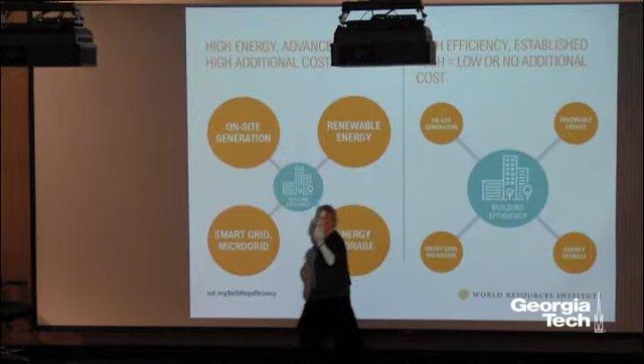It's not that we're opposed to the cool stuff—we like cool stuff, we all like toys, we're the center of the tech industry, right? But we start with this: make our buildings more efficient, then put the bells and whistles on, and we're all good.

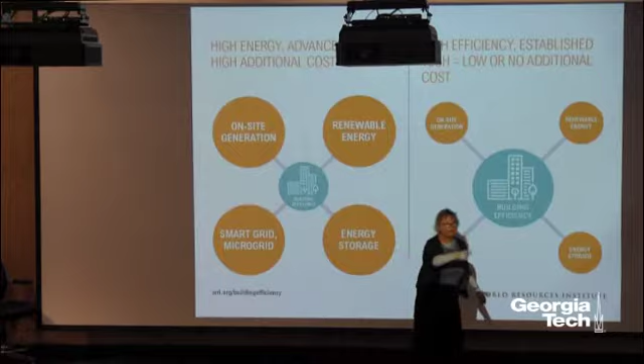Okay, one more question—you guys got to have dinner and stuff, and we're going to go to Mark's opening, which is supposed to happen in two minutes. So, one more question? No, it's got to come from a student. Come on, you guys, don't you ask questions? You're as bad as my students. Come on, how about you in the rainbow? You got a question? Yeah, you.

I always have questions. I was really taken with your talking about the nuclear industry.

The differences in California and the rest of the United States are particularly marked. We're still building Vogtle. Maybe you'll never open it. You never know, you really never know. But how do you see the rest of the United States being able to follow that California model of decommissioning plants?

So we have two really exciting killer apps. One of our killer apps is, as part of our building code, a requirement that you have to upgrade our Title 24 energy performance laws every three years.

So when Arnold Schwarzenegger was governor, he's like Trump, right? He didn't want to do it, so it goes up like that much. And then Jerry Brown, the old Governor Moonbeam, just retired. What he did is he said, I'm going to really take this up. He was incredibly demanding on the architects, but he created a lot of innovation, a lot of new opportunity.